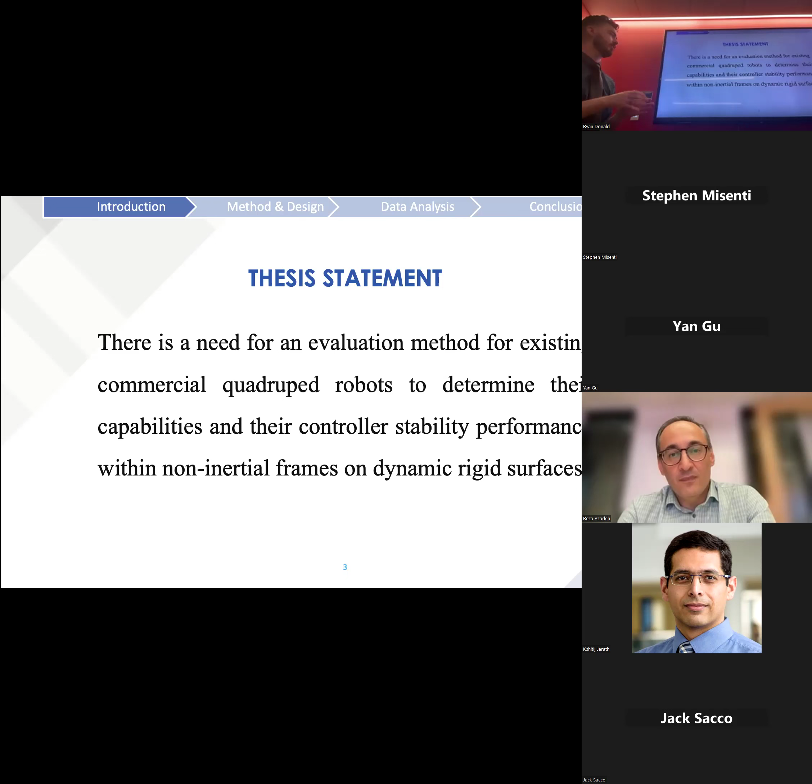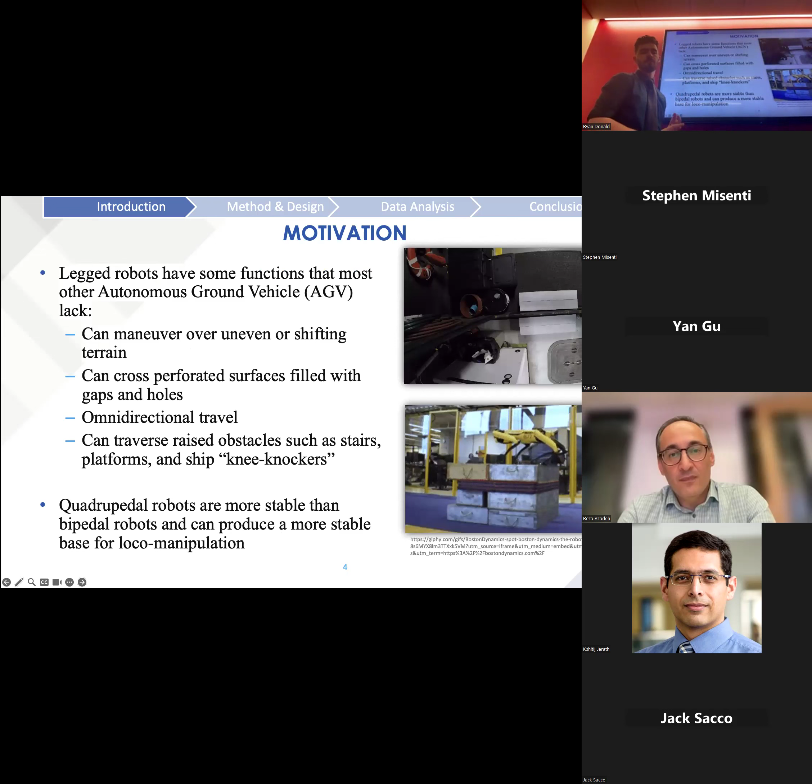Thank you for being here today. I'm going to talk about my evaluation of 2 quadruped robots on dynamic rigid surfaces. This is what we'll talk about today. Mainly I'm going to go over the design setup for my tests and the analyses of the data that I recorded. There's a need for evaluation of current commercial quadrupeds to determine their stability performance within non-inertial frames. Legged robots have inherent functions that wheeled and tracked robots don't, such as being able to cross non-uniform terrain, having omnidirectional travel, and the ability to traverse stairs and other raised platforms.

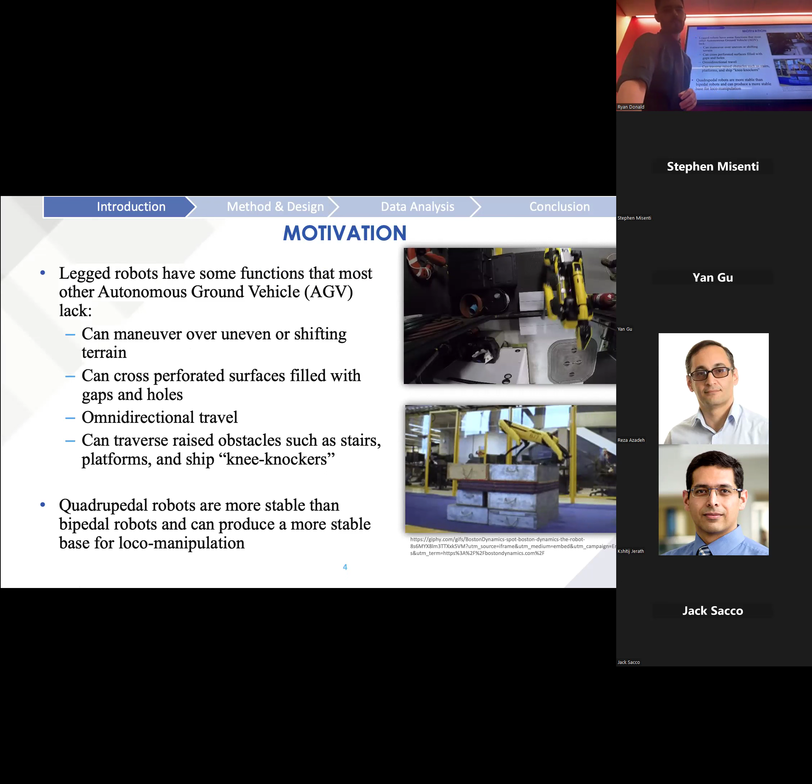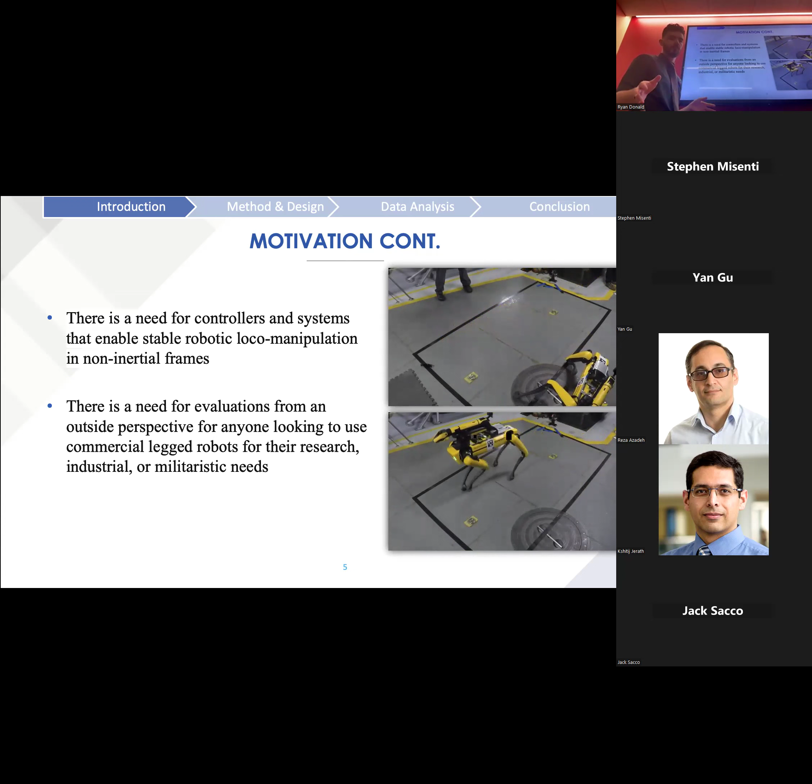There's a need for controllers for legged robots that enable locomotion in non-inertial frames, such as trains, boats, airplanes, and offshore platforms. There's also a need for an evaluation of these controllers and robot systems from an outside perspective. Here are some videos of Spot during my field experiments that show the robot struggled to move about.

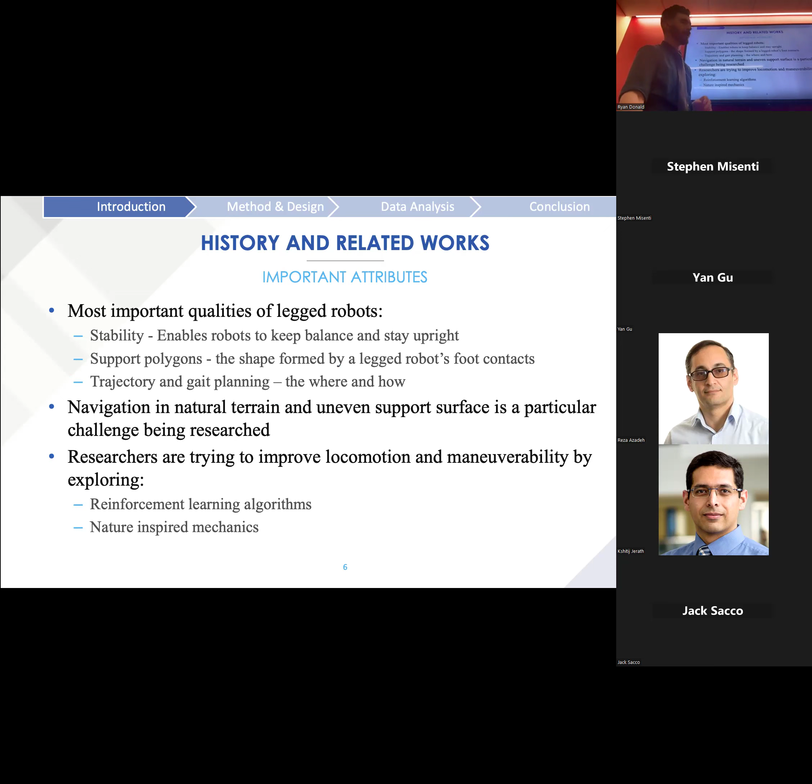Some of the most important qualities of legged robots include stability. Without stability, legged robots will fall over. Recently, researchers have been trying to improve legged locomotion in natural terrain and on uneven surfaces.

Dynamic rigid surfaces and non-inertial frames have an adverse effect on locomotion and manipulation within them due to disturbances. There isn't all that much research currently being conducted on robots on dynamic rigid surfaces, but some works include vertically moving surfaces and deforming surfaces.

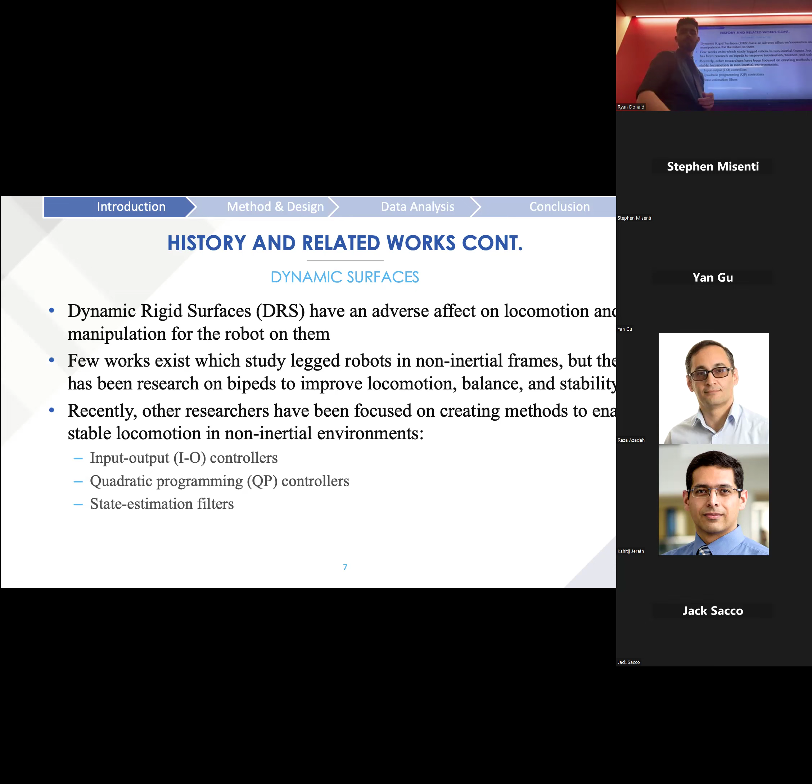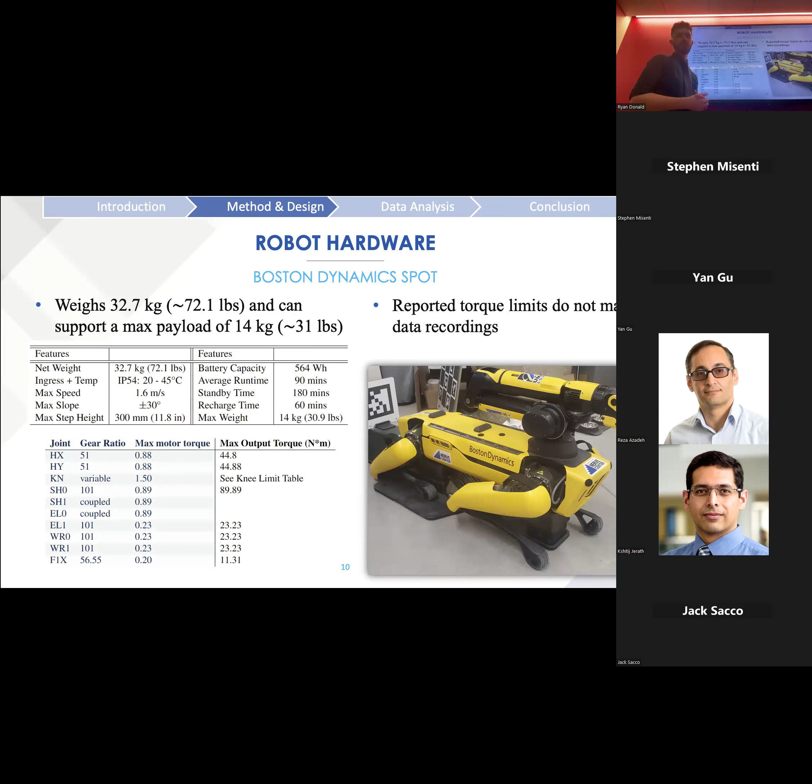The first robot that I tested on was Boston Dynamics' Spot. One thing to note is that the torque limits reported by Boston Dynamics do not match the data I recorded. The data I recorded exceeds these limits.

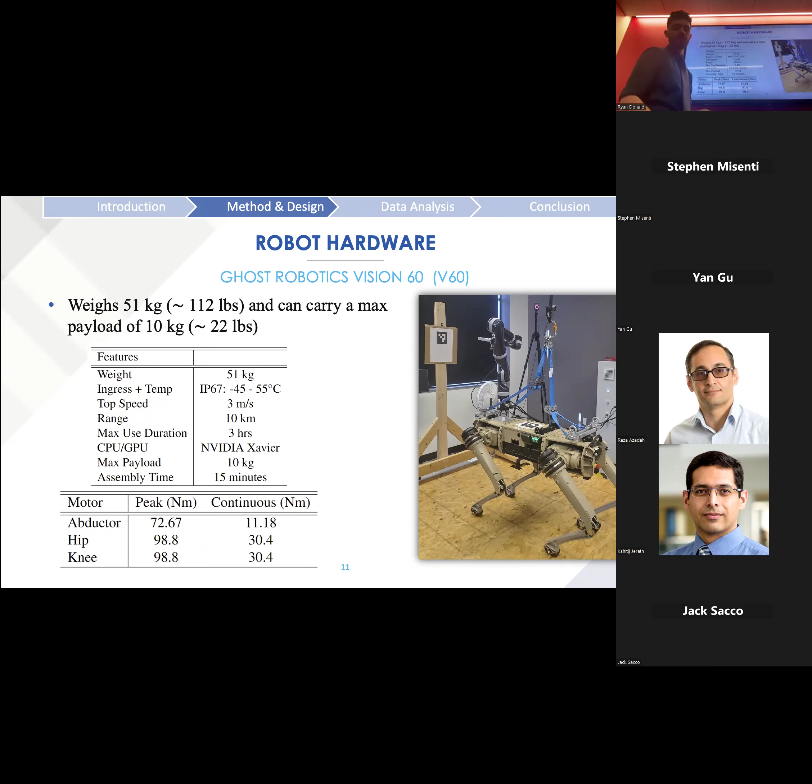This is Ghost Robotics' Vision 60, the second robot that I'm testing. One thing to note is that the Vision 60 weighs more than Spot but has a smaller payload capacity. This is a little size comparison between Spot and Vision 60 — you can see that Vision 60 is a bit bigger, and the arm is a bit bigger as well.

This is the arm that is on Vision 60, because Vision 60 does not have its own arm. The most important features of it are the 7 degrees of freedom and its reach, which is just a tad longer than Spot's arm's reach.

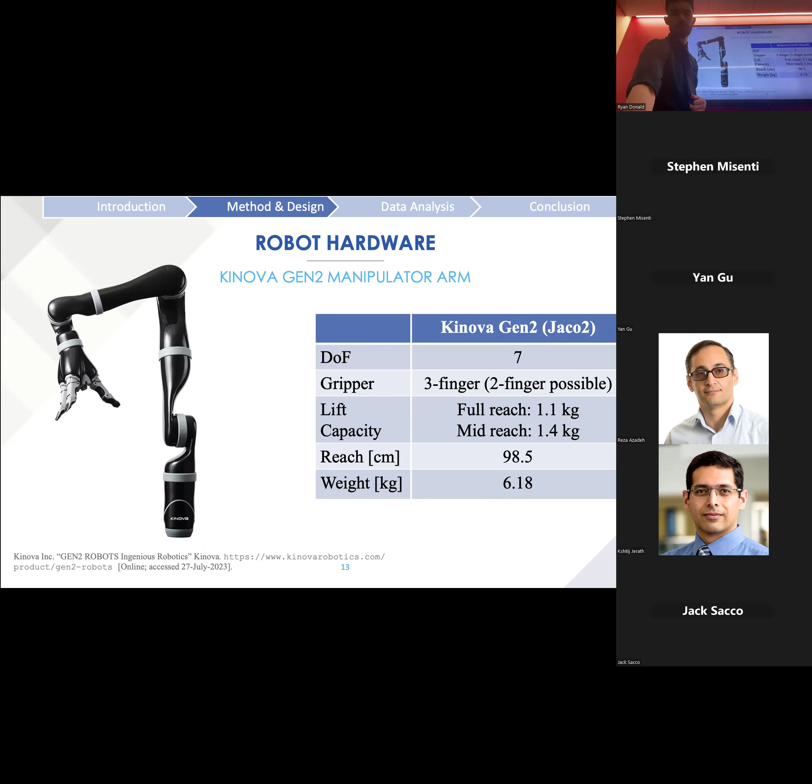In order to mount the Kinova arm onto the Vision 60's rails, I needed to design and machine a base plate for it. The original base plate did not fit on Vision 60's rails, so that's why I had to machine it. It's also machined using just one part in order to reduce the points of failure.

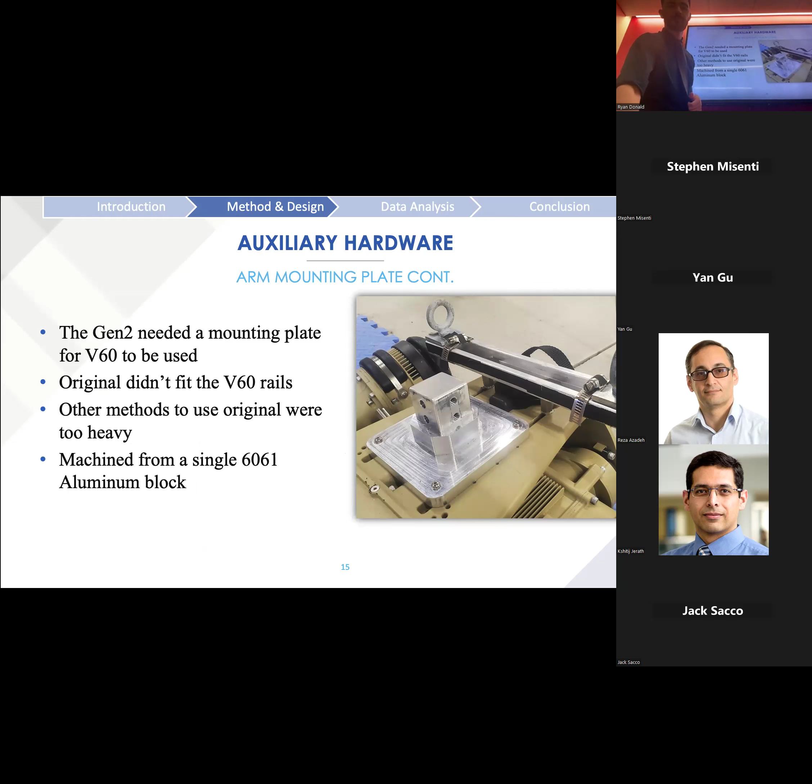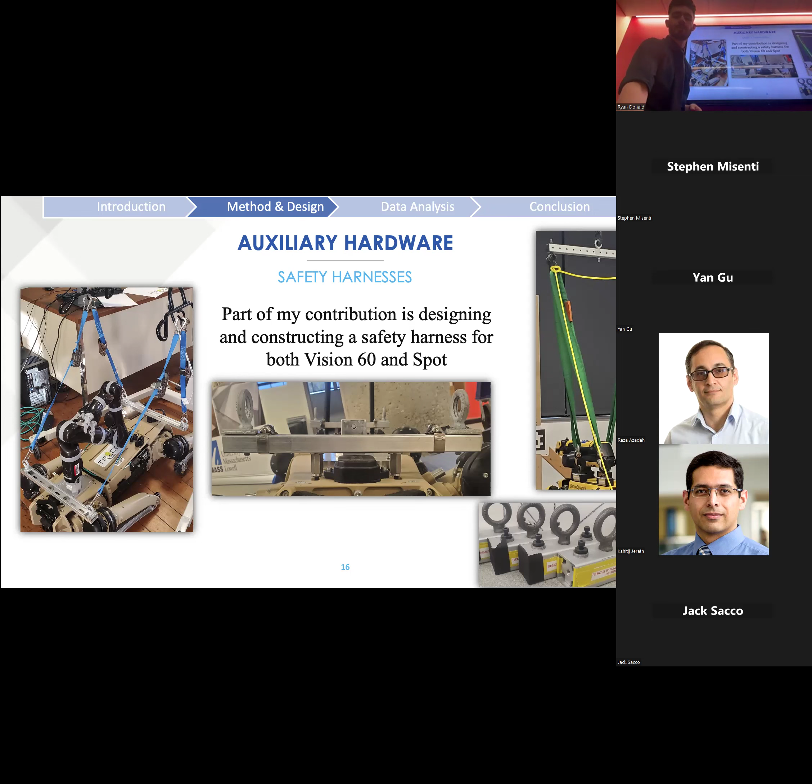Part of my contribution is also creating the safety harnesses, as I mentioned — there's one for Vision 60 and one for Spot. They were designed with the intent to prevent impact during my control experiments and protect the safety of the robot.

My control experiments were conducted on a Motek M-Gait treadmill. This was used to create or simulate a naval boat rocking in waves. It can pitch forward and backward 10 degrees and sway left and right 5 centimeters. One thing that is lacking is the vertical motion that is most notable on ships at sea.

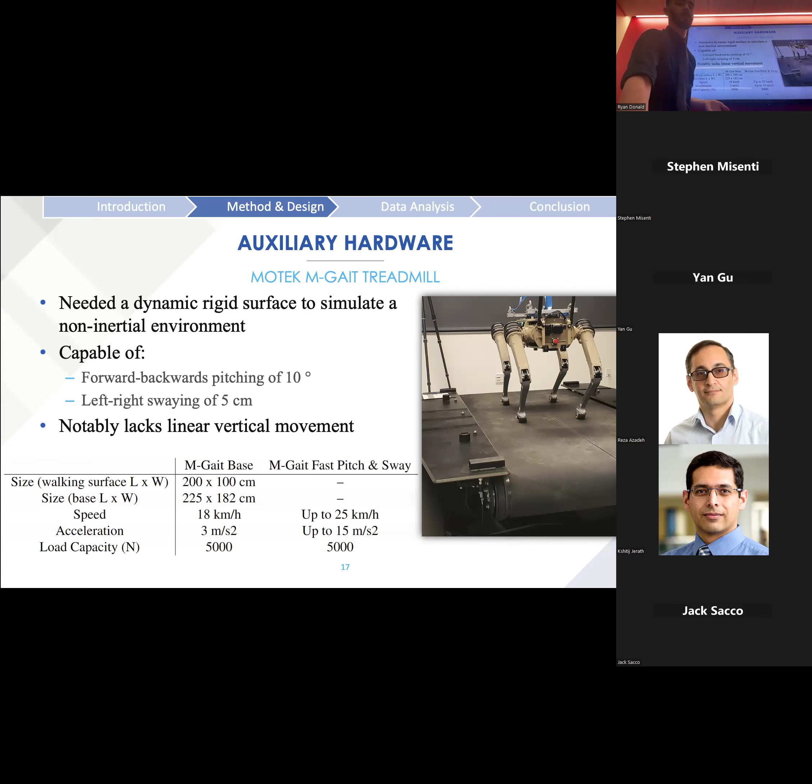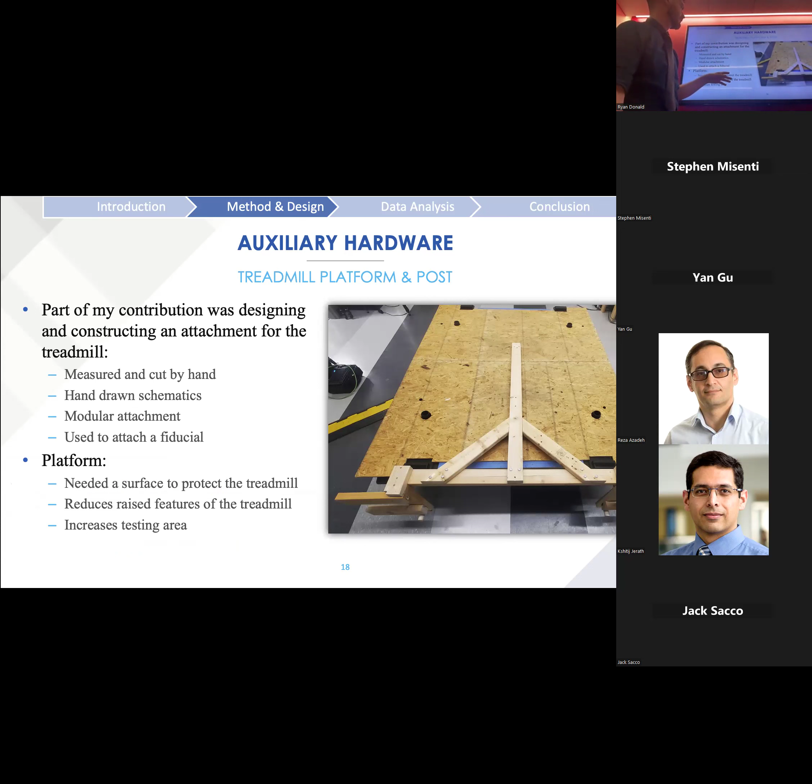For my experiments, I also needed to construct an attachment for the treadmill I mentioned earlier. This was used to attach a fiducial for some of the tracking. The platform you can see was used to protect the treadmill from the robot's impacts.

14 motion capture markers were used — 9 on the robot and 5 on the treadmill. There were 9 used on both robots: 4 were put on the trunk, 1 on each foot, and 1 on the end effector. For the treadmill markers, there was 1 on each corner of the platform and 1 by the fiducial.

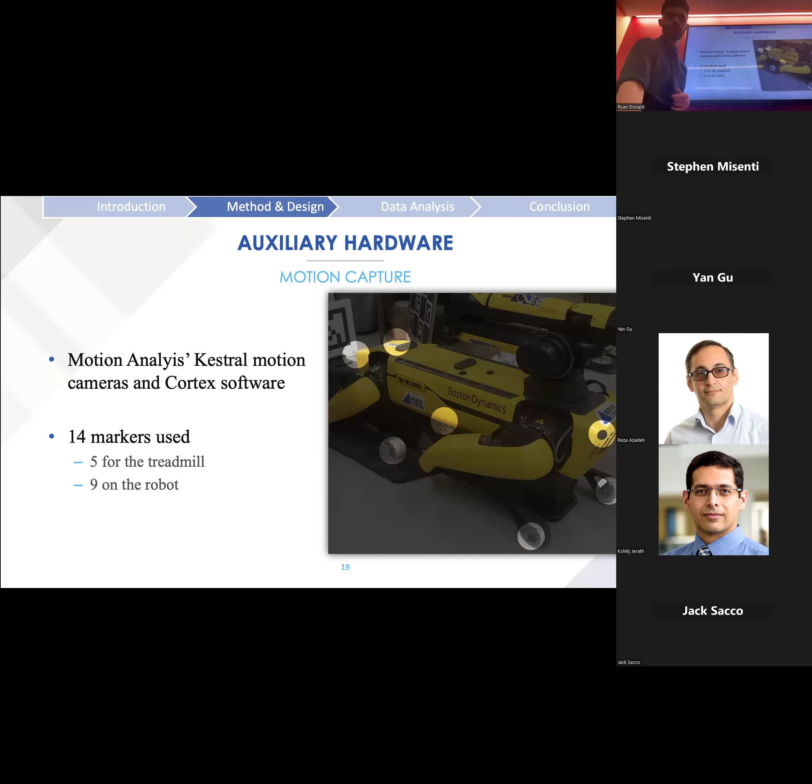The field experiments were conducted at Norfolk Naval Base aboard the M80 Stiletto. This was facilitated with the help from NRL, Naval Research Labs.

These are the field experiments that I conducted aboard the Stiletto. Each trial was 3 to 6 minutes, and unfortunately there was only 1 trial per experiment type. 4 wave states were conducted: at pier, underway, sea state, and S curves. At pier was at 0 knots, underway was 10 knots, and the sea state and S curves were at 20 knots.

The underway and sea state had the boat going through rectangular motions, whereas the S curves were doing serpentine patterns.

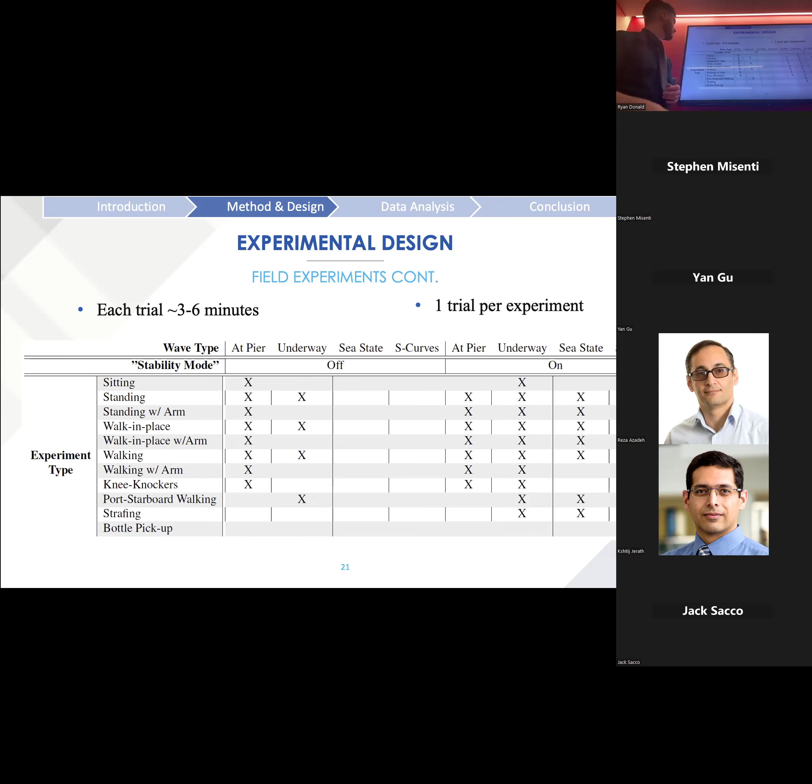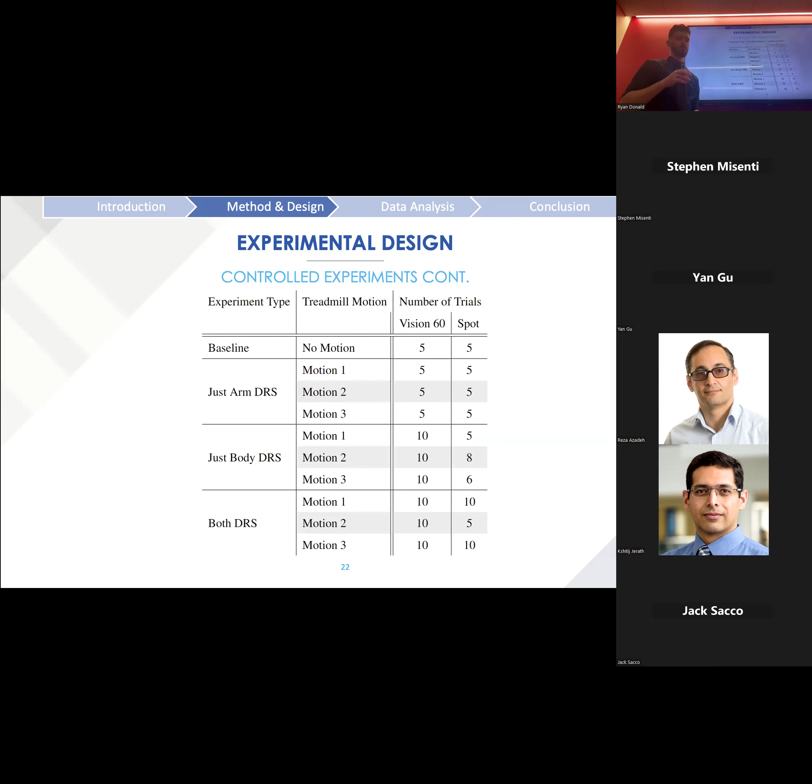These are the control experiments that were performed on Vision 60 and Spot. The baseline has no treadmill motion. The just-arm experiments only utilize the arm, the legs weren't moving. The just-body experiments only used the legs, the arm wasn't moving. And the 'both' experiment is when both the legs and the arm were moving.

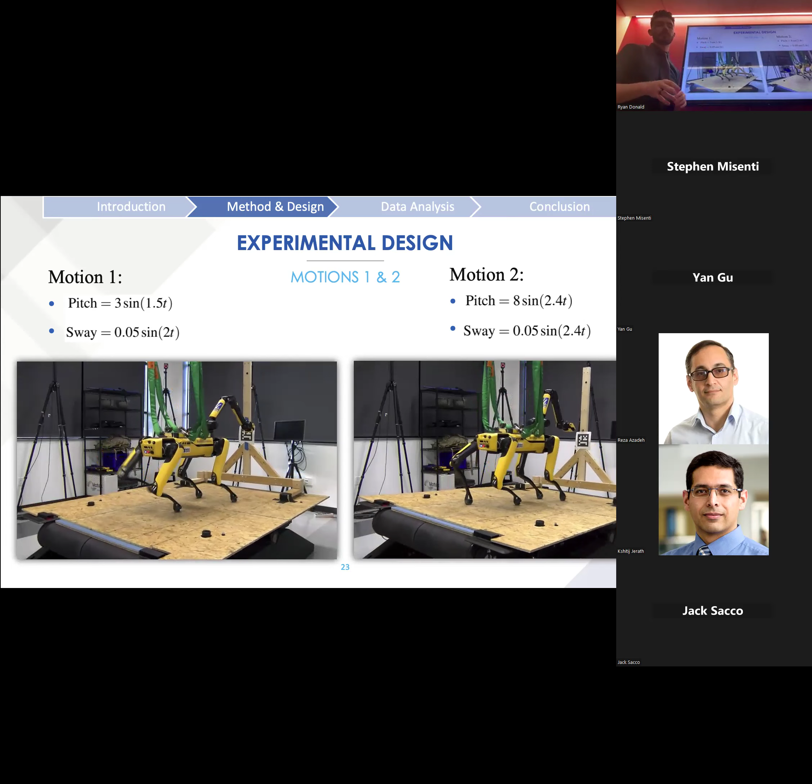These are motions 1 and 2. Motion 1 has the pitch going about half the performance of what the treadmill is capable of, whereas motion 2 is almost at full performance. It also has a faster frequency for both the pitch and the sway.

For motion three, I used the field experiment IMU data to get a motion equation for the pitch and the sway.

I took the data, parsed it, and performed a fast Fourier transform to get the wave amplitudes and frequencies, then found the peaks of the amplitudes. I then double integrated using the trapezoidal integration method and found differences between the bow and stern IMUs to get the pitch equations, and performed the Euclidean of the X and Y to get the sway equations.

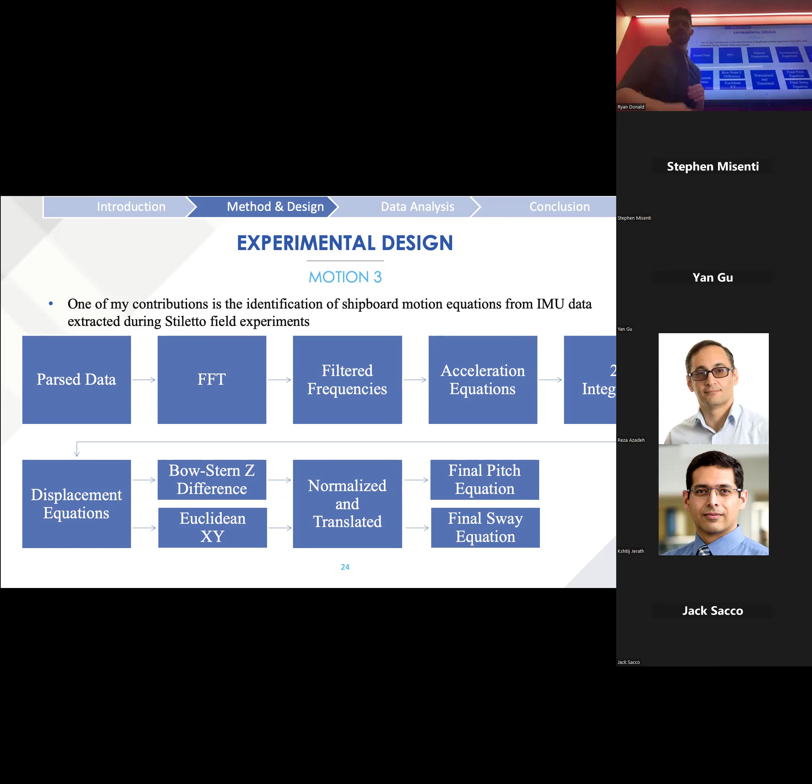This is what motion three looks like, at 5x speed. We can see that the treadmill has some sudden pitching movements and swaying movements.

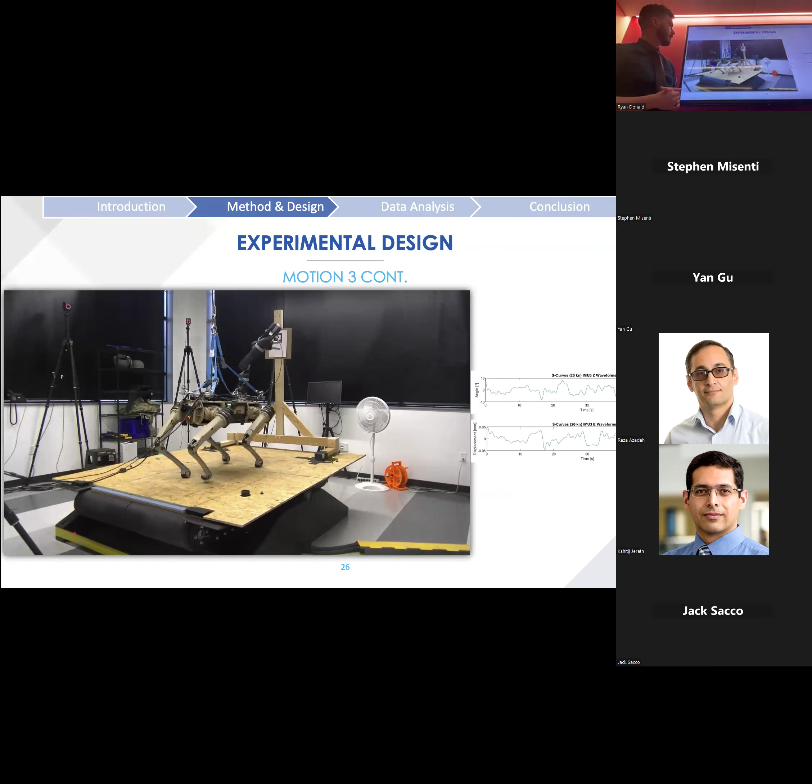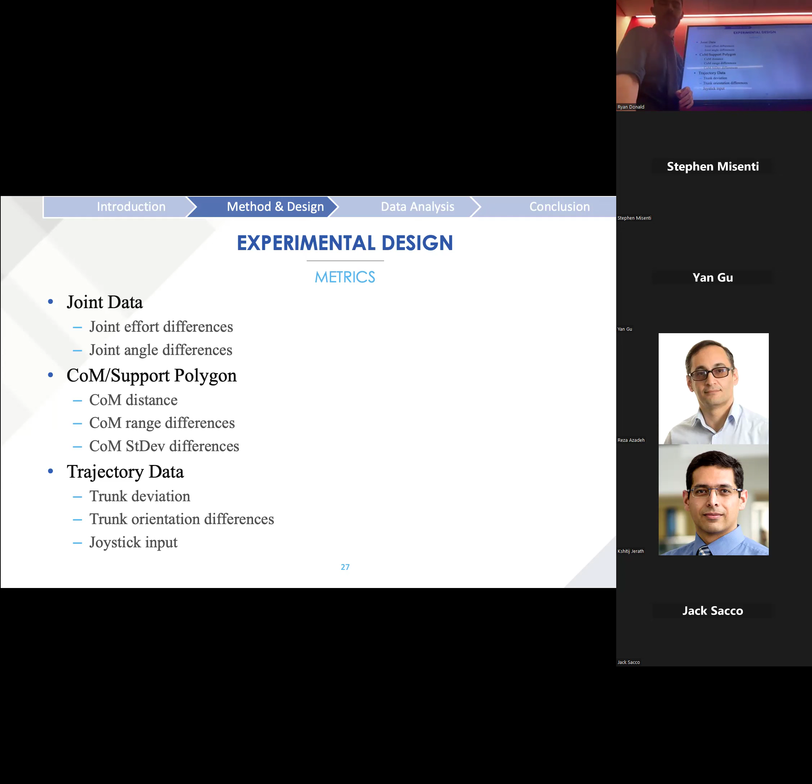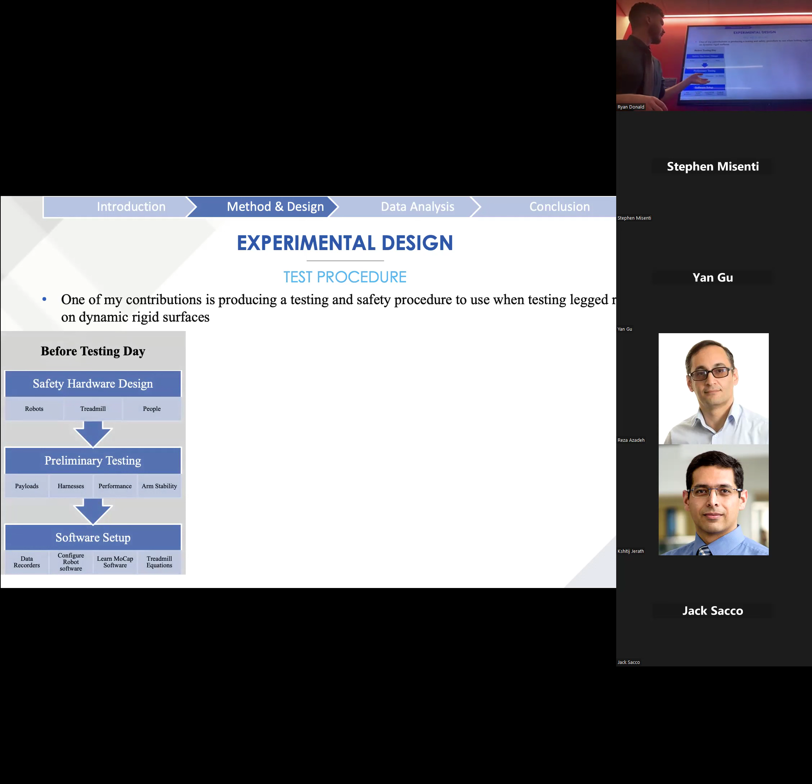Part of my contributions is producing the testing and safety procedures. There are 3 phases for this. There's before the testing day, where you design the safety setup, do some preliminary testing on the robots figuring out what it's capable of, what it's not capable of, and the software setup in order to get it ready.

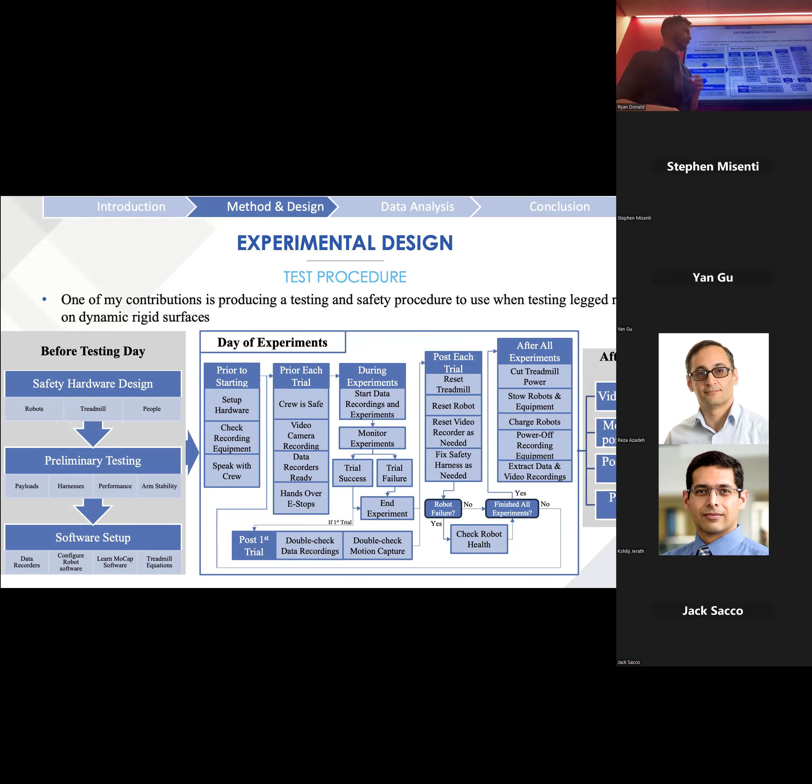Afterwards is just resetting everything and making sure that the recorders are prepared for the next experiments. Then afterwards is basically putting everything away, charging the robots, and extracting all the data. After experiments is doing all your video and data processing and analyses.

Part of my data processing was calculating the center of rotation. This was needed in order to perform proper transformations to get the marker locations in the treadmill frame from the world frame. To do this, I performed an ICR using kinematics.

This is where you take 2 time steps, the current and a future time step, and get 2 locations at those time steps. For this, I used the front marker locations and the aft marker locations. You connect a line between those 2 locations and then get the bisectors of those lines, and the intersection of those lines gets you the center of rotation.

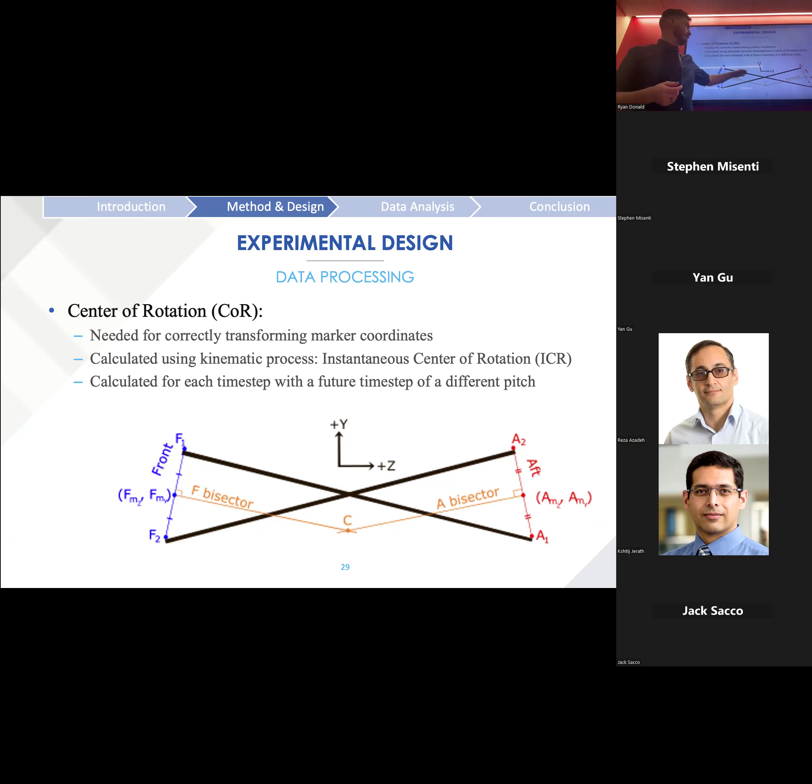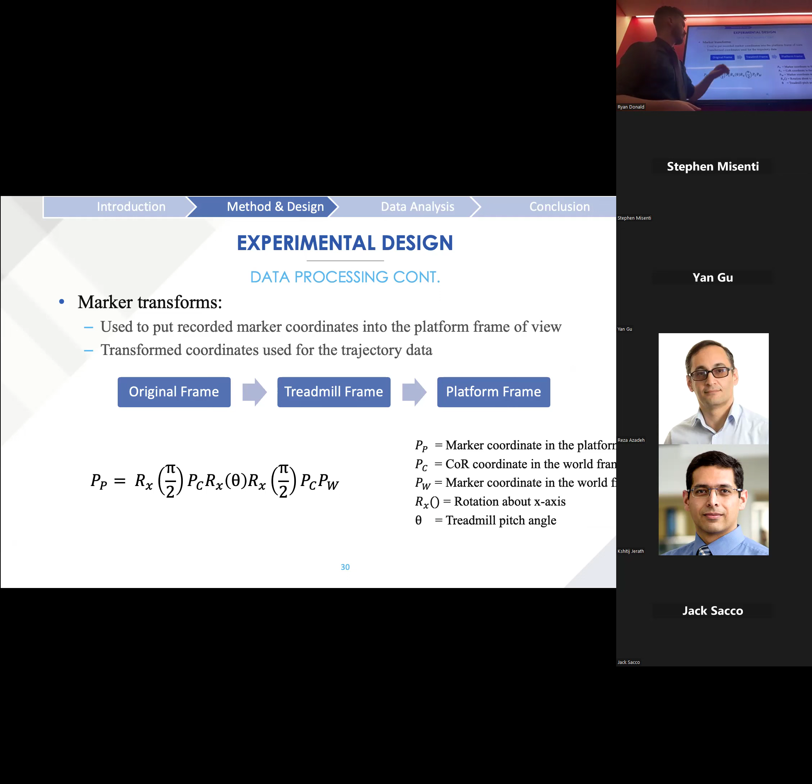This is the equation I use to transform the markers from the world frame to the platform frame, first going to the treadmill frame.

I also needed to calculate the approximate center of mass location of the robot from the experiments. This was done by getting the approximate location of each leg, the arm, and the trunk of the robot, and doing a weighted average.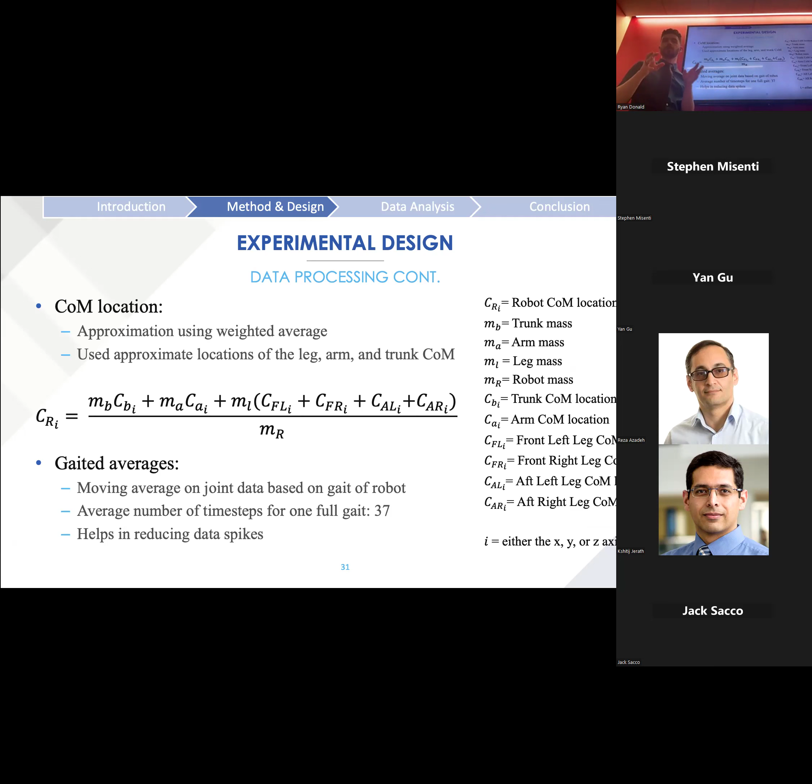For my joint efforts, I also performed a gaited average, which is basically a moving average of the data based on a full gait, which I estimated to be an average of 37 time steps. A full gait is when a legged robot lifts up its foot and puts it back down.

All right, getting to my results. So the standing experiments from Stiletto, this is what the data looks like for the joint efforts.

I forgot to mention that I'm going to be looking at 4 different series: there's standing, walking in place, and the strafing and port to starboard plots, which you'll see after this. Standing experiments had the least amount of torques that could be seen in the data, and the walking experiments had the most similar amount of values.

We can also see that as the sea states got worse, the values increased and the value ranges increased.

These are what all the plots look like. The typical trend is that the hips and abductors share similar values, but the knees have much larger values. This makes sense because the knees hold up the majority of the robot's weight. Another thing I noticed is that the aft motors have higher torque values than the front. This is a little strange because the weight of the robot is towards the front, so you would think the front motors would have higher torque values.

Overall, like I mentioned before, the S curves and sea states have much higher values, but the sea state has higher averages, which we can see here. The moving platform mode is software that NRL wanted to use to help the stability of Spot, and that had higher average torques when it was being used than without.

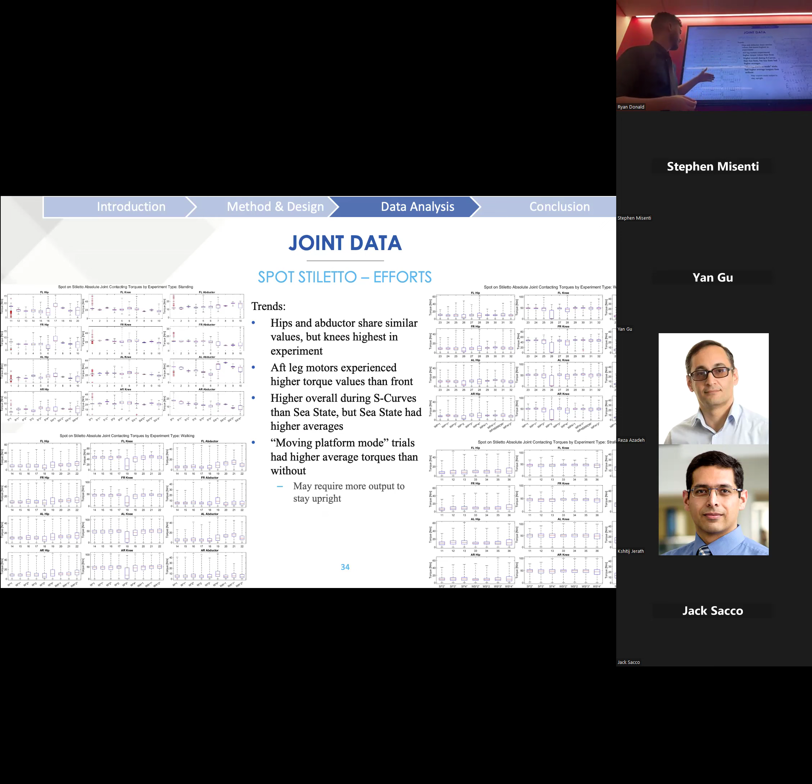This is the gaited average that I performed on the efforts. We can see that the aft motors again experience larger torques with the gated average performed on them, and that when the arm was deployed, there were higher torques than when it wasn't. We can also see that some outliers show that some gaits had much larger values, and that the gaits were consistently large torques.

Compared to the non-gaited average data, we can see that the plots are a bit more scattered, and that the minimum torque values do come to the surface, so we can see an average of the minimum gaited torques.

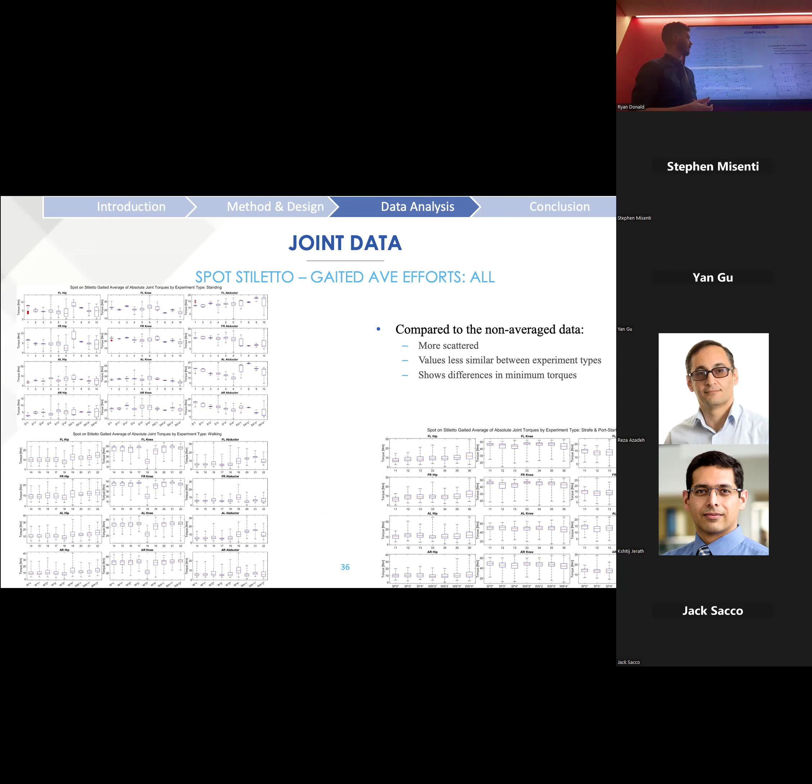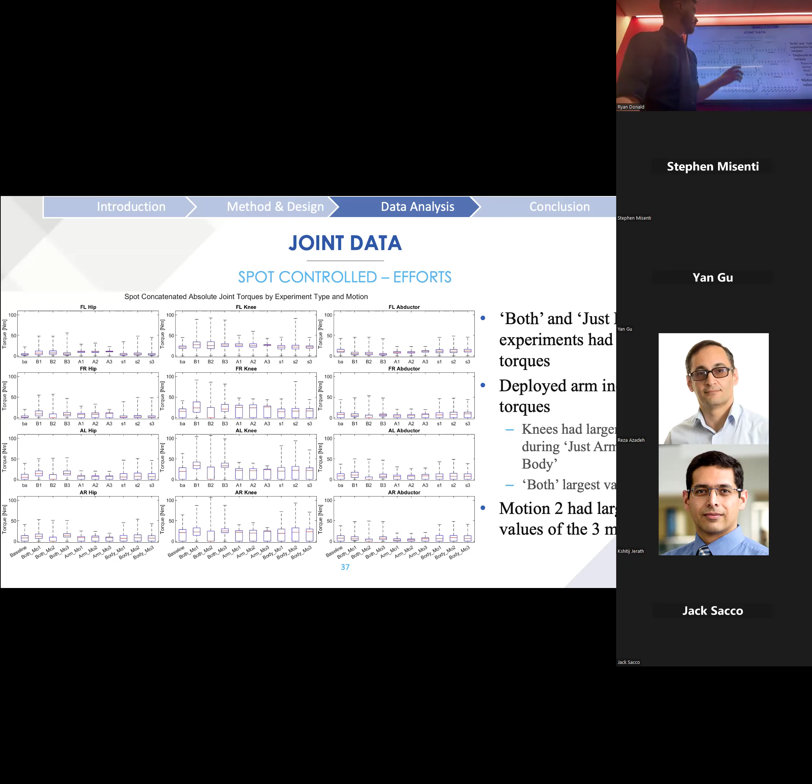For Spot's controlled experiments, both the full-body and just-body experiments had much larger torques, and when the arm was deployed, it increased the torque values. Motion 2 out of the 3 motions had the largest values.

Performing the gaited average process on the torques for Spot's control experiments didn't really show too much extra, but we can see that they did not create non-zero minimums, unlike what we saw for the Stiletto experiments, and that the majority of the data was there. The 25th percentile line was at 0, showing that for a large period of time there was no torque for Spot.

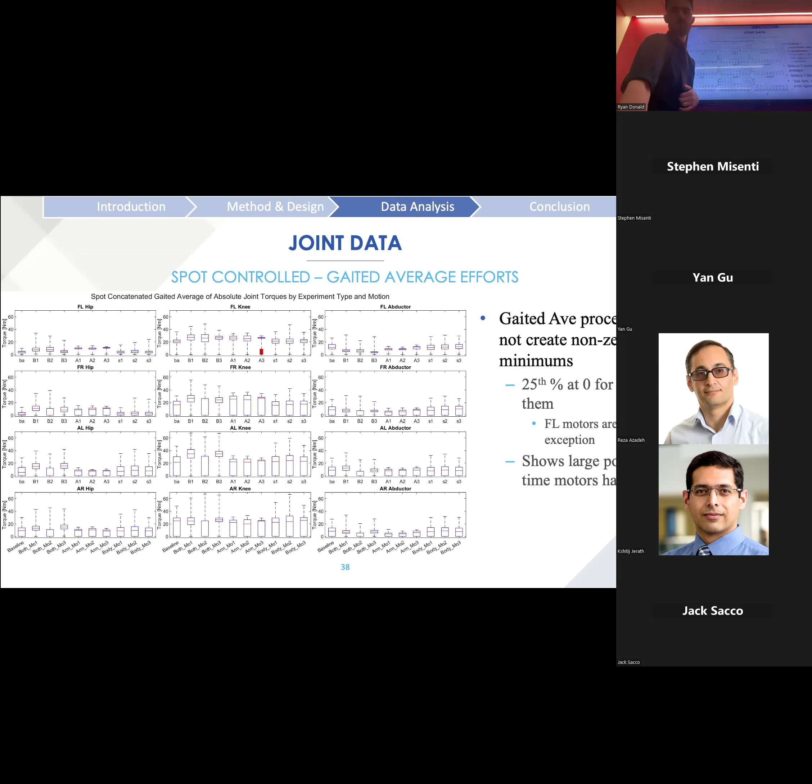Vision 60's controlled experiment efforts: one thing I noticed is that none of the motors reached their peak limits, but the continuous limits were being exceeded when looking at the averages. However, even with this knowledge, none of the experiments failed for Vision 60.

Comparing between Spot's field and control experiments, we see that the maxes and averages were similar between the field and control experiments. But the control experiments had larger abductor values, whereas the field experiments had larger knee averages. This could be due to the type of motions the robots experienced: the control experiments had a consistent left-to-right motion, which could explain the abductor values, whereas the field experiments had a consistent vertical motion, which would explain the knee values.

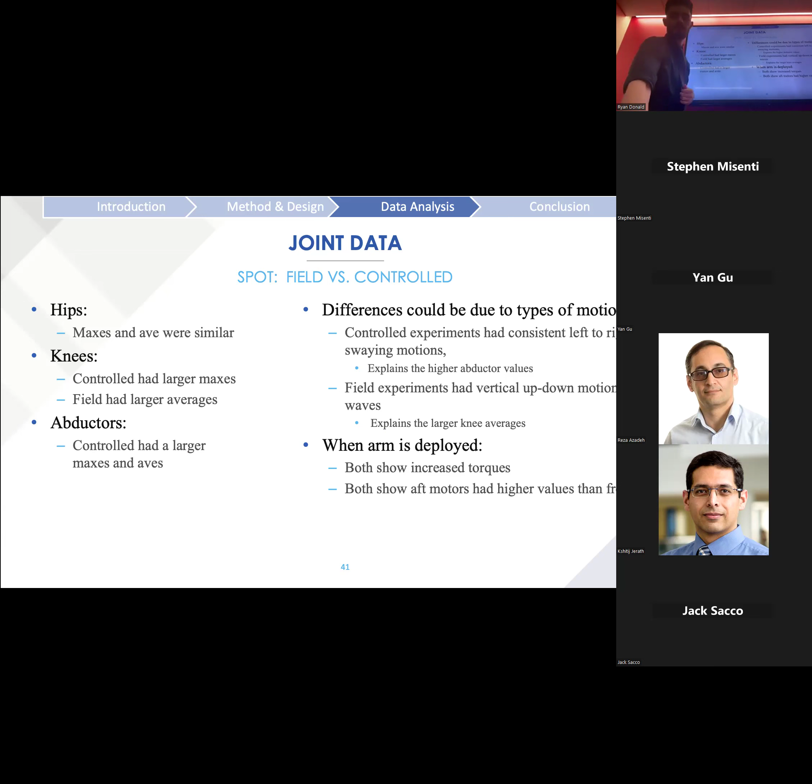Compared between Spot and Vision 60, we can see that the full-body and just-body experiments, where the legs were in motion, had much larger maximums than the baseline. This is for both Spot and Vision 60, and it's most likely due to how the center of mass is shifting.

We also can see that compared to Spot, Vision 60 has smaller arm torques than the baseline, which could be due to the way Spot stepped during experiments. Vision 60 had 2 legs that stepped up and down, whereas Spot had 1 leg that stepped up and down, one at a time.

Comparing between the two, we also know that Spot had larger torque maximums and that Vision 60 had higher averages. As I mentioned before, Vision 60 had those longer, lower whisker values, whereas Spot had longer upper values, so the majority of Spot's torques were towards the bottom of its range.

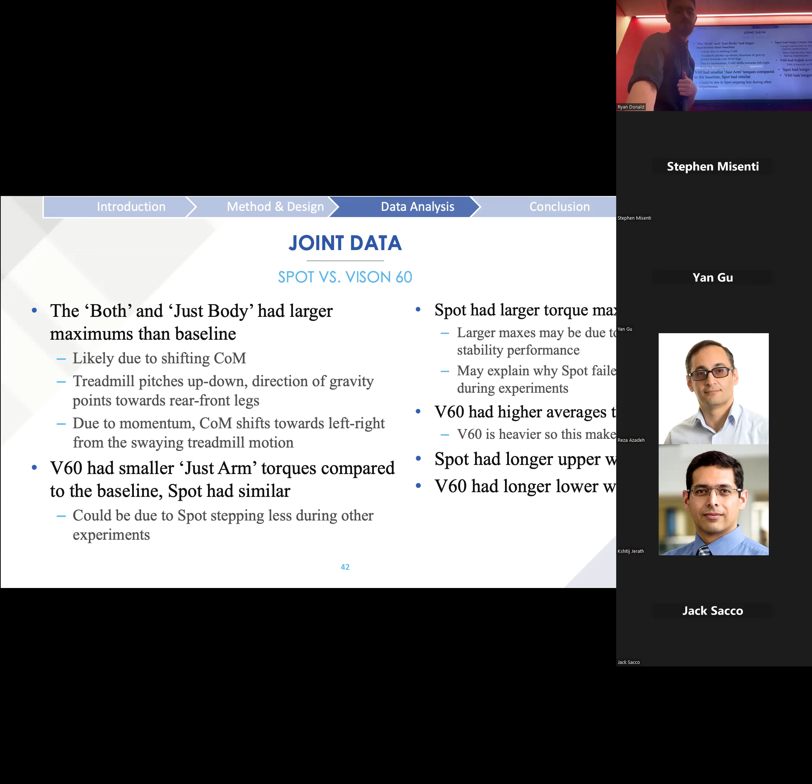Next, I compared the angles of the experiments, the joint angles. Some trends we saw during the Stiletto field experiments are that again, the sea state and S curve angles increased as the sea states worsened, so the sea state and S curves were the worst out of the 4. One thing I noticed is that when the arm was deployed, there wasn't too much difference in the angles experienced.

Now is a good time to mention that during this field experiment, Spot was very unsteady during wave swells. As the boat hit a wave and the G-forces changed, Spot had a very difficult time moving about and staying in place.

And for the stiletto experiments, there are also these other plots for the other experiment types. These long whiskers from the standing experiments and this range of outliers is most likely due to recording errors that occurred. Either the recordings started too soon, too late, or ended too late, and that's why there are these values. Going over the video recordings, Spot didn't step at all during the experiments, so they shouldn't have these large whiskers.

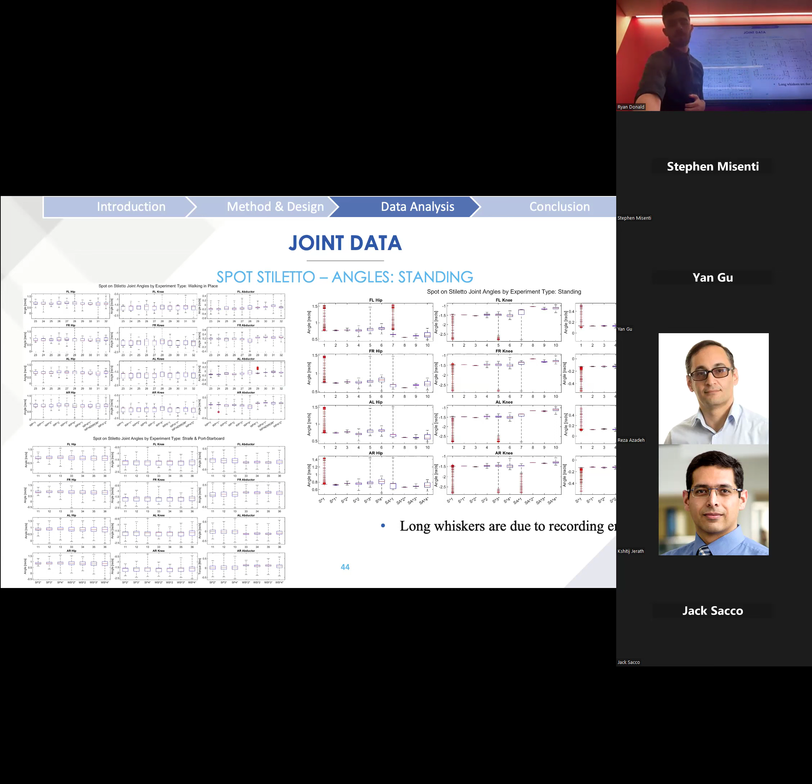Controlled experiments for Spot show that all the values are very similar, but when we look at the both experiments, we can see that the 50 to 70, or 25 to 75 percentile boxes, are very small. We can also see the red mean line is at the top of the box, whereas for the rest of them it's at the bottom.

This most likely shows that, compared to the field experiments, the angles were much larger and more consistent.

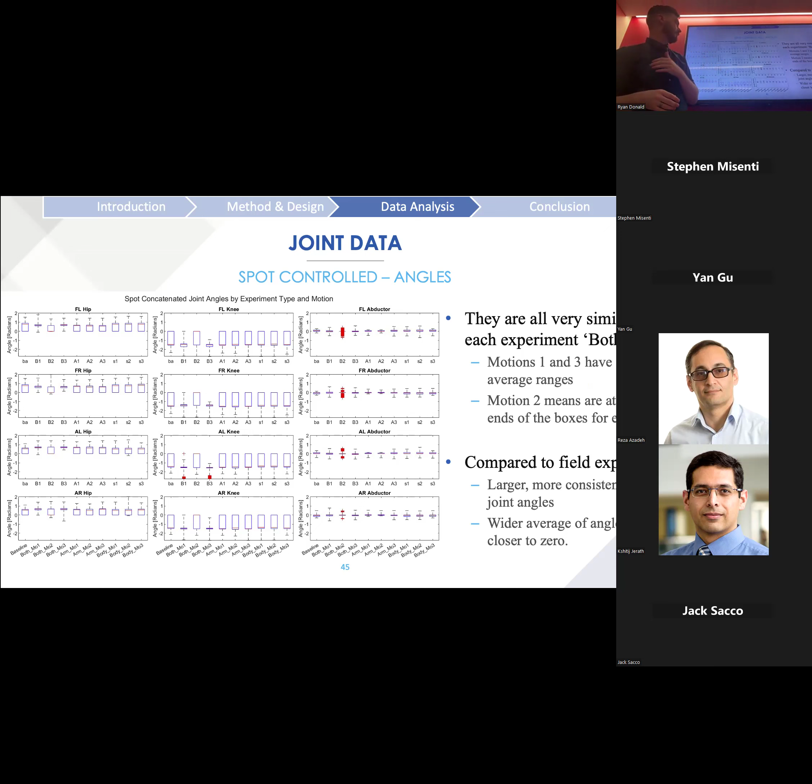Vision 60 also had a very consistent range of angles during the control experiments. We can see that during motion 3, the 25th to 75th percentile boxes were smaller and higher up, which shows that there was a difference in how it stepped during motion 3. Either the robot didn't step as much, or the way it stepped was different during motion 3.

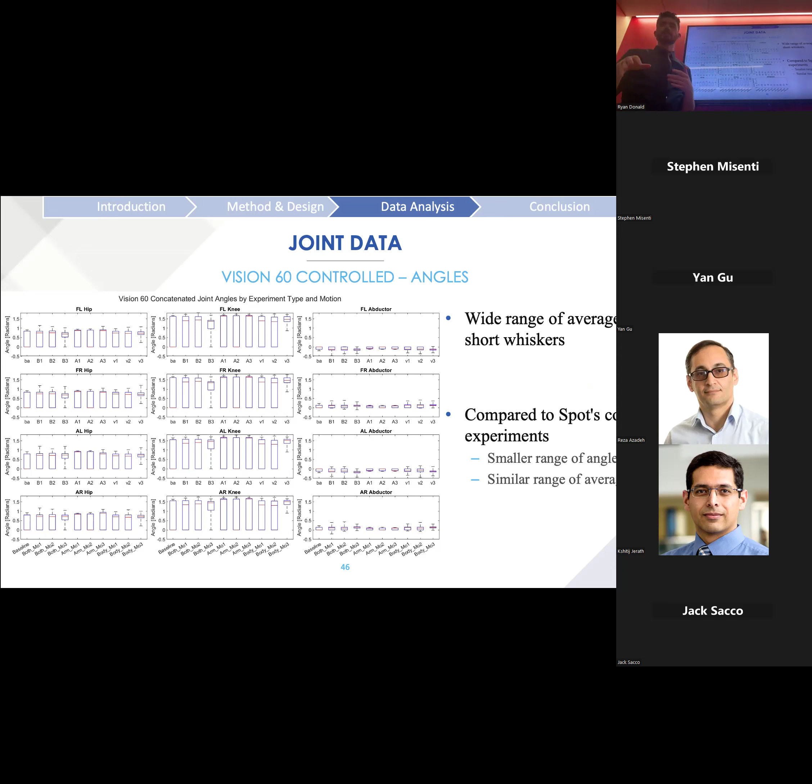The support polygon center of mass distance is the distance from the projected center of mass, in the direction of gravity, against the ground, whereas the support polygon is the connection between the feet of the robot. In this case, as the values get smaller, it's worse, because as the center of mass gets closer to the edge of the support polygon the distance is smaller, meaning that when the center of mass exceeds the support polygon, the robot could potentially fall over.

So when looking at these, we're trying to see what causes those smaller values. We can see that the smallest values come from the both experiments across all 3 motions, and that if the maximum distance the center of mass could be for the experiments is 78 millimeters, more than half of them exceeded 50% of that distance. We can also note that this was during motions 1 and 2.

The arm experiments had very wide ranges of averages, and motions 1 and 2 have the worst values.

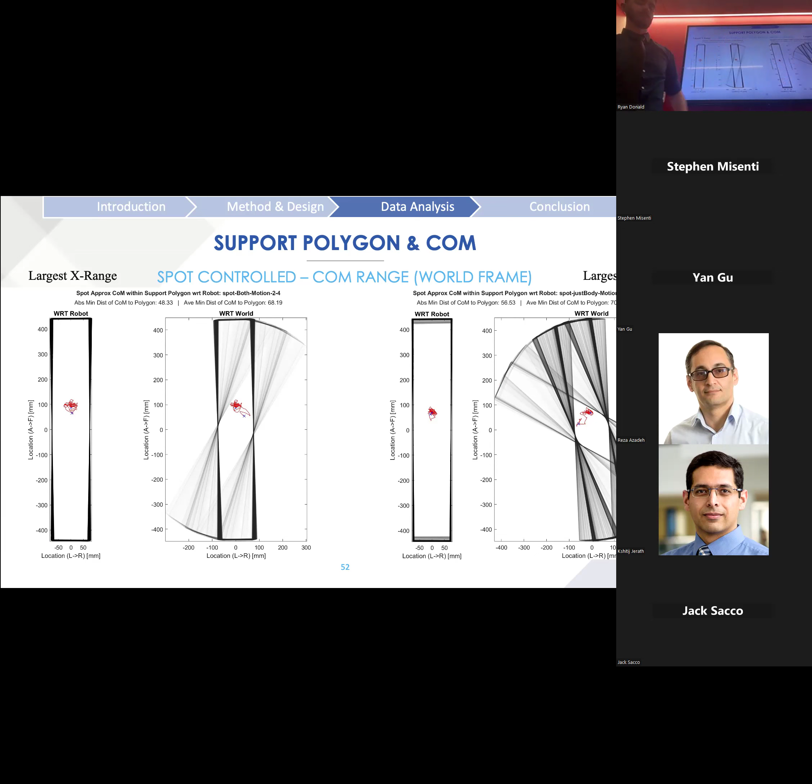For Vision 60, in the X direction, the values don't change all that much, but we can see that Motion 2 does have the highest values. And in the Z direction, the experiments that use the arm, both the combined and just-arm experiments, have double the values of the baseline or just-body experiment.

If we look at the baseline here, we can actually see that the values are significantly higher than all the other experiments. I'll get to that in a second.

But we can see that the baselines are much higher than the others. In the world frame, we again see that the baseline is higher, and much of the information is the same. Part of the reason is that, unlike Spot, Vision 60 maintained its heading for the most part, whereas Spot moved around a lot.

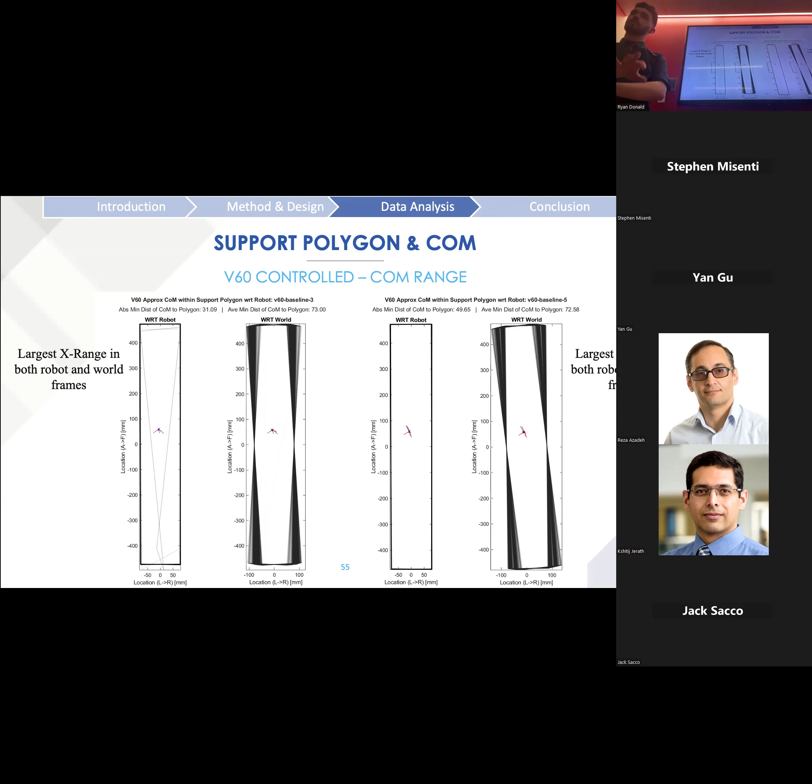These are the two experiments that had those large values during the baseline experiments, and we can see that these red lines show spikes in the center of mass. If we look at this experiment here, we can see that these transparent gray lines show that there was some crossing of the legs during one of the experiments.

Comparing Spot to Vision 60, both had large Motion 2 values, which reaffirms that larger disturbances lead to larger center of mass ranges. Both Spot and Vision 60 had larger Z values when the arm was deployed, which shows that the arm has a significant impact on the center of mass from the pitching motion. We can also see that Spot's world frame and robot frame values were higher than Vision 60's.

Now I'm going to talk about the standard deviation of those ranges, which shows the grouping of the center of mass.

In the X direction for Spot, Motion 1 has the largest values in many of the cases, and during the arm experiments, the range of averages is much higher or wider. In the Z direction, we can see that the arm experiments have much higher values as well.

In the world frame, we can see that in the X direction the arm values are smaller, but in the Z direction they're much larger. We can also see that, again, Motion 1 has some of the highest values.

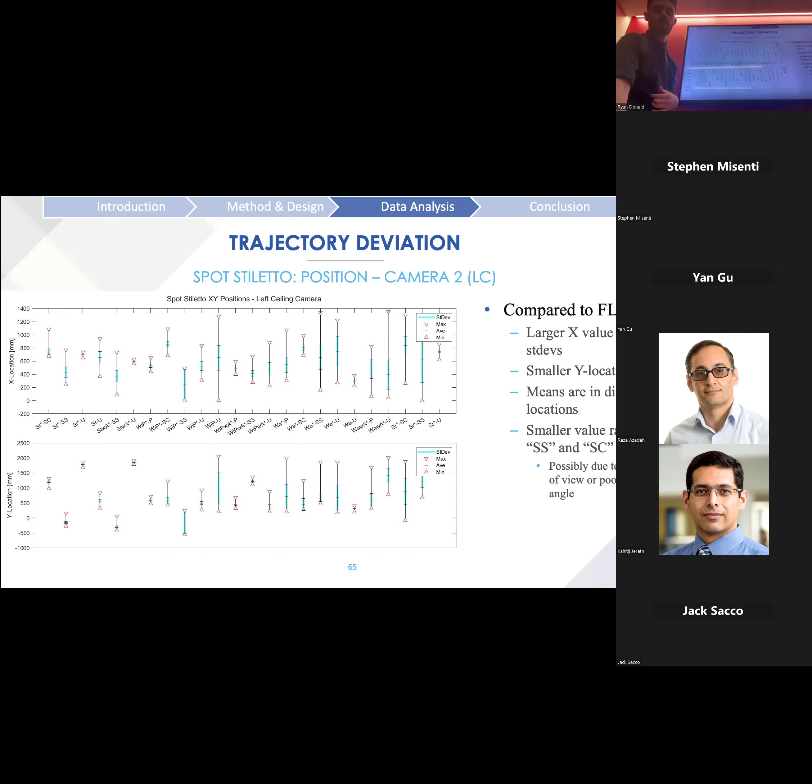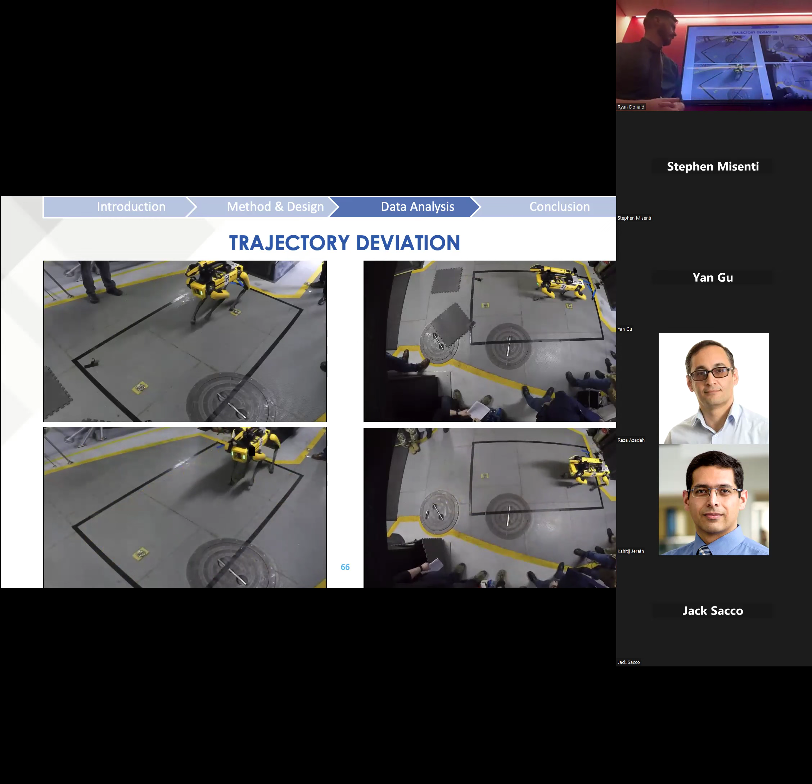For the controlled experiments, Spot has similar position values throughout. In both the X and Y direction, the arm and body experiments, 1 and 3, were similar. We can also note that the Y value averages are towards the front of the robot, which shows that Spot tends to move forward during the experiments, and the X value averages are towards the right, which also shows that Spot moves towards the right during the experiments.

For Vision 60, the arm values are much smaller here, as you can see. And we can see that the both and the just body experiments have a large position deviation, which does show that the stepping in place increases the trajectory deviation. Comparing between Spot and Vision 60, they both had similar X baseline values, and Vision 60 had larger Y baseline values. This could be because Spot did have some code function that kept it in place. Yeah.

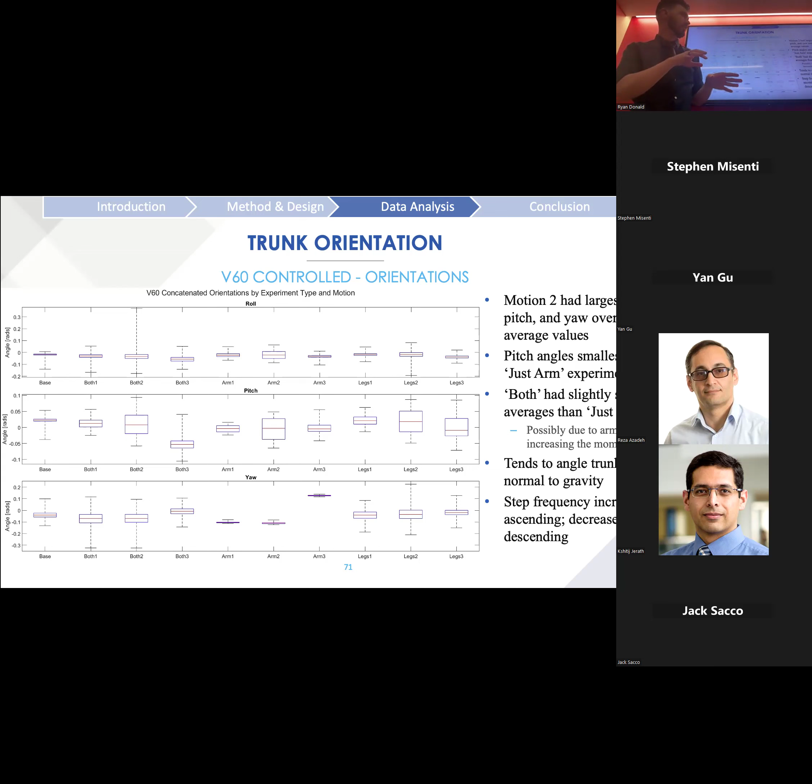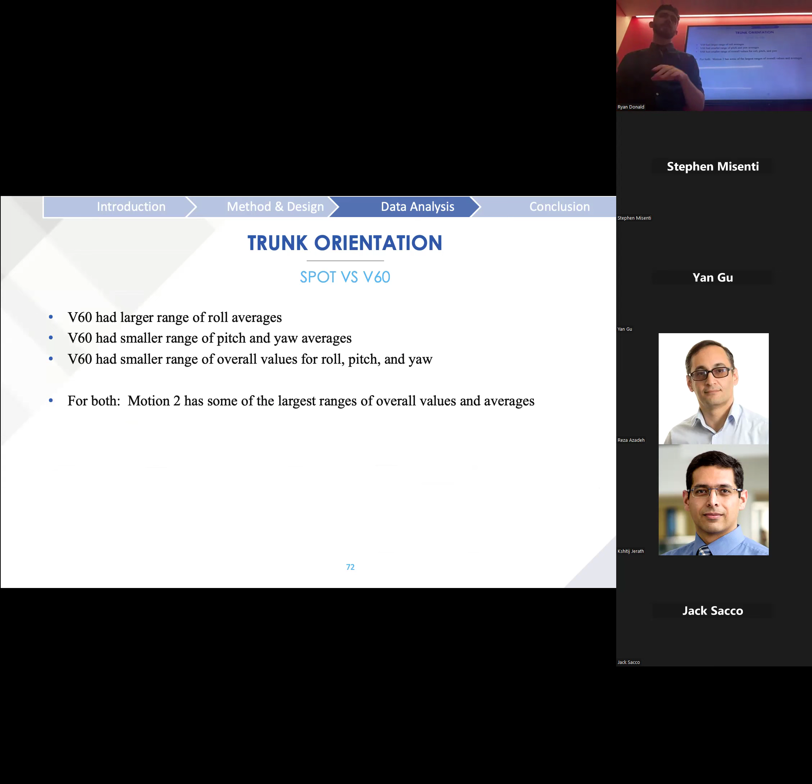Comparing between the two, Vision 60 has a larger range of roll angle averages, but a smaller pitch and yaw. And for both Spot and Vision 60, motion 2 had the worst angles. And the last topic that I'll be talking about is the joystick input that was used during Stiletto's experiments and Vision 60's controlled experiments. Spot did not have any joystick input.

The data that is of interest is the linear X, linear Y, and angular Z values. And for Stiletto's experiments, we can see that there is non-zero linear Z, angular X, and angular Y data that was recording. And this is possible because it's a combination of Spot's internal data and what was used with the joystick inputs.

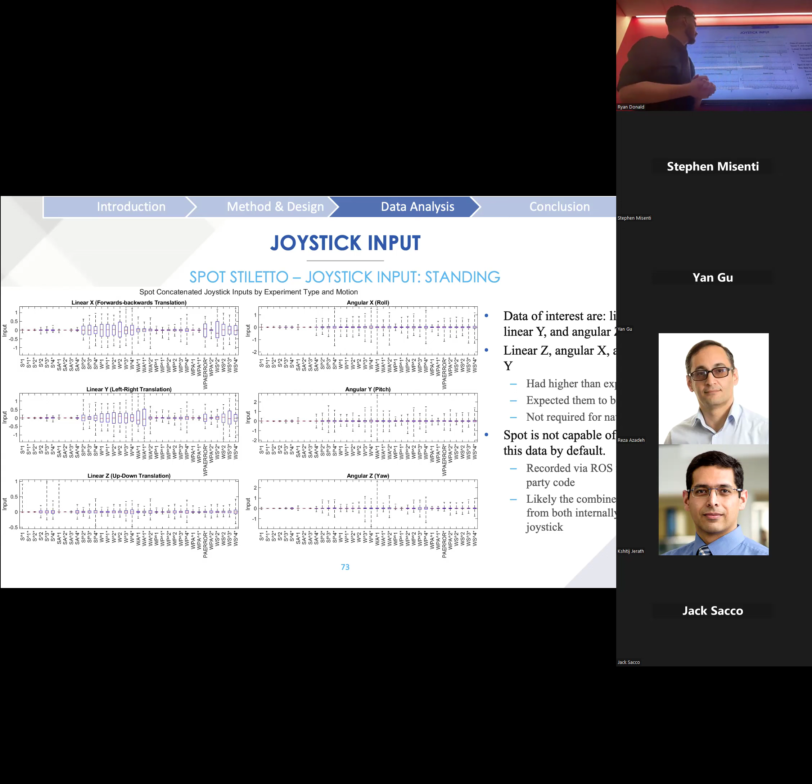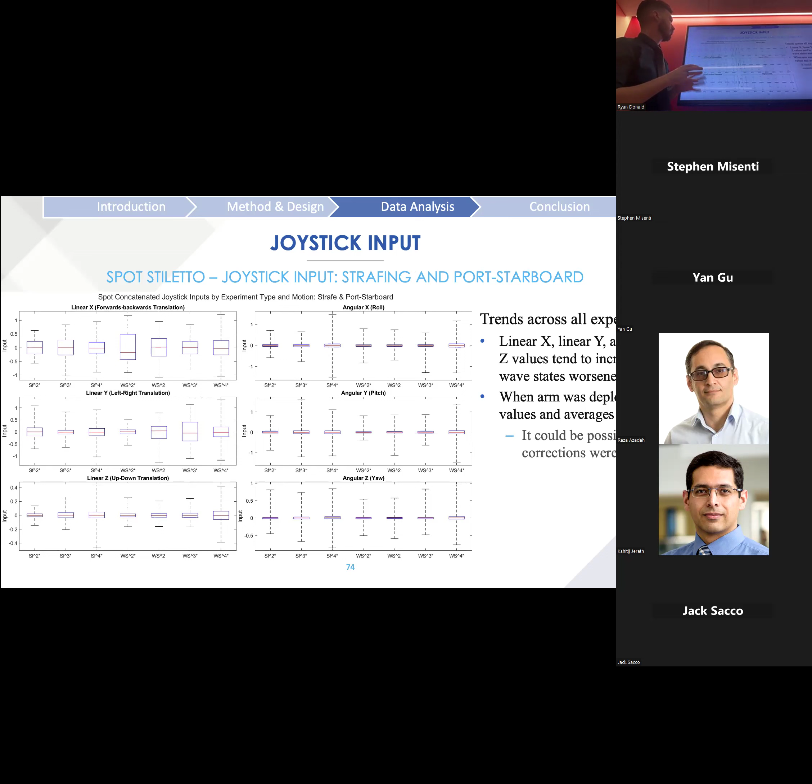We can see that as the wave states worsened again, the values tended to get worse, and that when the arm was deployed, the values actually got lower.

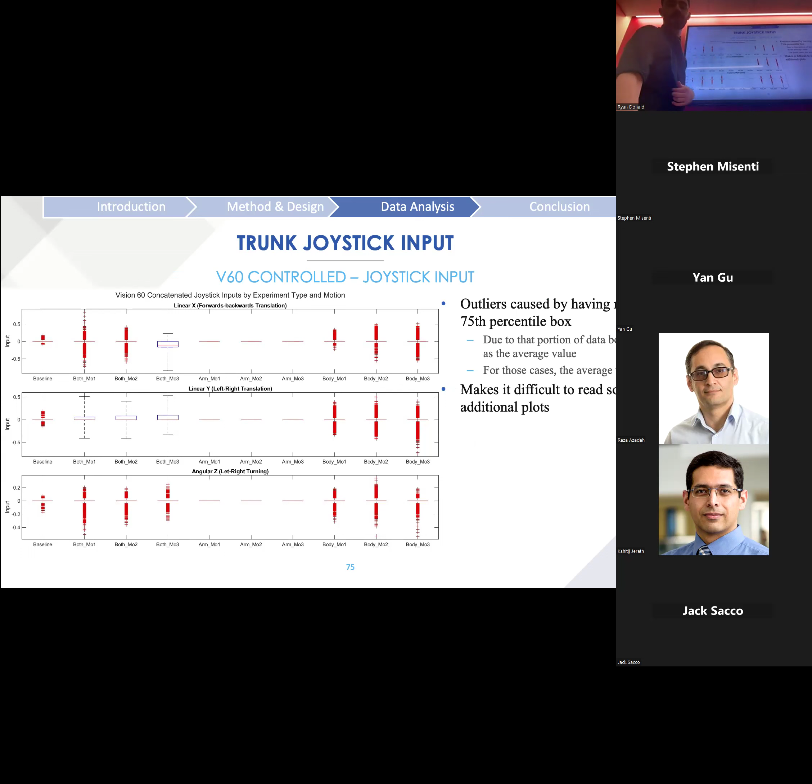Vision 60's controlled experiments. We can see that there are a lot of outlier markers, and just thin lines. This makes sense for the arm experiments as it didn't move at all, and these outlier markers are because there's no 25th to 75th percentile box, which means any data that's not at 0, which is less than half of it, is an outlier. And we can see that both experiments are the only experiments that have a 25th and 75th percentile box, which means it did require more movement. And this is what I just talked about.

Comparing overall between Spot and Vision 60, or between Spot's control experiment and field experiments, we can see that during the field experiments, everything got worse as the wave states worsened, and that Spot had difficulty walking during wave swells. In control experiments, Spot mostly had difficulty during motion 2. During those experiments of motion 2, which was the heavier treadmill motion, Spot had a lot of failures during testing, and that could be why the data reflects it.

Between Spot and Vision 60, Spot seemed to overcompensate a lot for any disturbance from the treadmill, and I think that because Vision 60 didn't have any code that was trying to correct it, that was why it was more stable. We also know that Spot's center of mass distance of support polygon was a lot smaller, meaning it was worse percentage-wise, and that Vision 60's were a lot better, and that the center of mass location range and standard deviation values were much higher than Vision 60's.

And Spot also generally had larger displacements and trajectory deviations than Vision 60. And lastly, Vision 60 appeared to be more stable when the arm was in use. This is what I contributed for my thesis: testing and safety procedures for legged robots on dynamic surfaces, the construction of safety harnesses and other apparatus, the identification of the IMU shipboard motions, and an evaluation of the two robots.